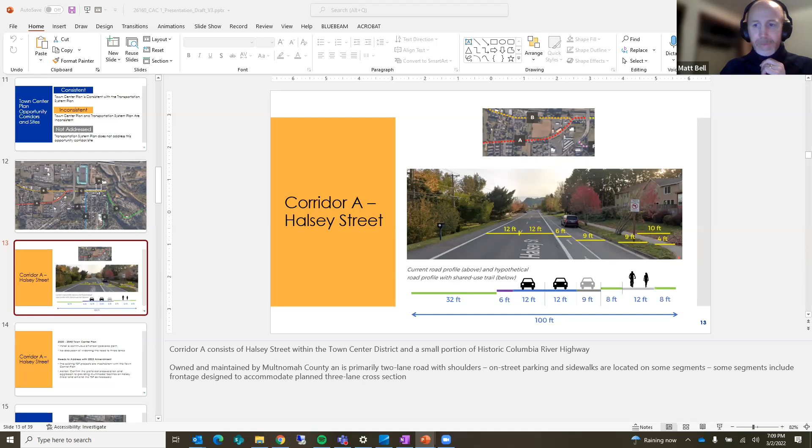So with that, Amy, do you want to go to slide 2? I'm not sure what other folks are seeing, but I'm seeing corridor A. Okay, I did not share the right screen. Thank you.

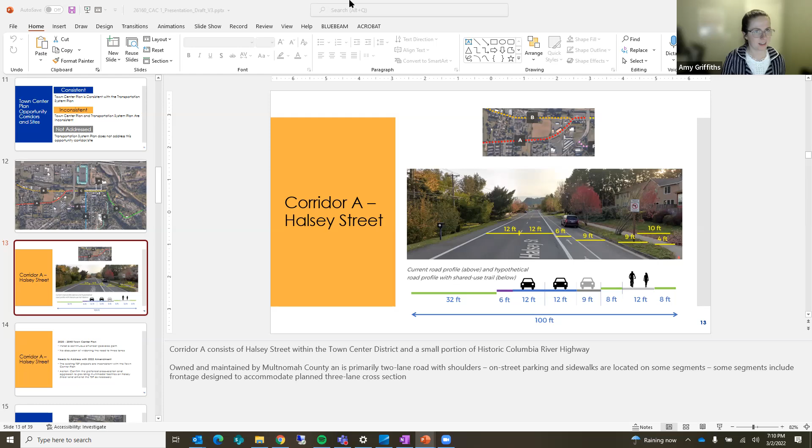So the agenda for tonight: we're going to give you a quick introduction to the project team and the role of the Citizens Advisory Committee. We'll talk at a high level about the project schedule and overview, and then I'll turn it over to Amy to talk about the corridor sites, opportunity corridors, and sites.

Next slide. The project is really largely going to be guided by three different groups. There's the project management team, which primarily consists of the City of Troutdale and the consultants, who do the day-to-day operations and create big decisions and recommendations along the way. We lean pretty heavily on the Citizens Advisory Committee to review the memos, provide input, provide guidance on policies, and give general input on how you'd like to see things within the community. Lastly, we'll spend time with the Planning Commission and City Council, as the Planning Commission will ultimately approve and recommend adoption, and City Council will be adopting.

In addition to these groups, we've also established contact with Multnomah County. As you'll see later on, a lot of these facilities will be Multnomah County facilities, a lot of the opportunity corridors we're going to talk about are Multnomah County facilities, so we'll want to make sure we're coordinating with them as well.

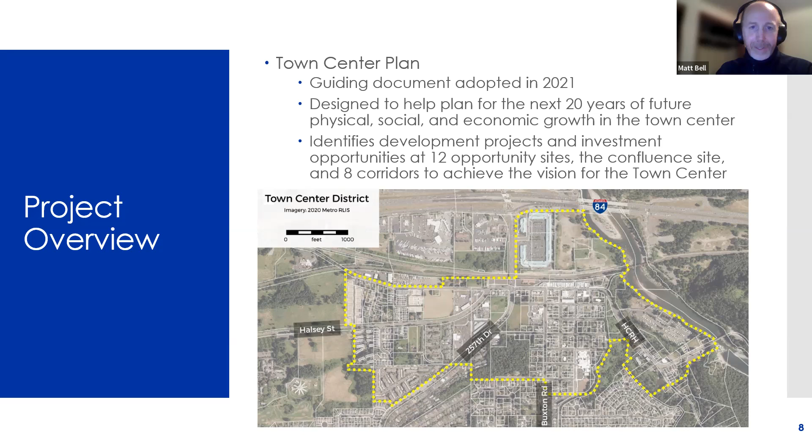So again, the town center plan. I understand you guys are becoming pretty familiar with this plan, but just a real quick overview: critical for us going forward is that this is a guiding document adopted in 2021. It is designed to help plan for the next 20 years, so it's a long range plan similar to the transportation system plan. It looks at physical, social, and economic growth within the town center, establishing priorities for a variety of things. It also identifies development projects and investment opportunities on the 12 opportunity sites, the confluence site, and these 8 corridors to help achieve the vision of the town center.

So a large focus of what we're going to be doing going forward is based on these opportunity sites and corridors. Again, I understand you're getting familiar with the transportation system plan, but just a quick review: it's a long-range plan adopted in 2014, but as I mentioned, some of the data in there precedes 2014 by quite a ways.

It provides goals and policies for development of the transportation system over time. It provides an inventory and evaluation of existing and projected future conditions. I believe it's a 2035 timeframe for this plan. It also identifies multimodal improvement projects needed to address existing deficiencies and future needs, and separates these projects into what's called a master plan and an action plan.

The master plan is a list of basically all the gaps, all the deficiencies, all the needs identified throughout the transportation system planning process. It's a rather comprehensive list of potential improvements that far exceeds what is reasonably likely to be funded over that same time frame. The action plan was an attempt for us to prioritize projects from the master plan into a more financially constrained project list that could reasonably be funded.

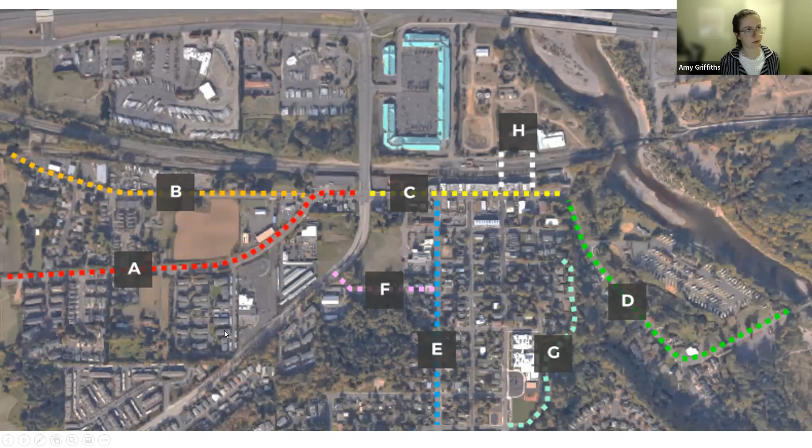The first one is Corridor A—Halsey Street within the town center district, and a portion of the historic Columbia River Highway. It's currently owned and maintained by Multnomah County, so as Matt mentioned, any changes on this roadway will have to be approved by the county, and we're definitely getting their input. Today it's primarily a 2-lane road with shoulders, with on-street parking, a bike lane, and sidewalks along some segments, plus some segments include frontage designed to accommodate a planned 3-lane cross section.

The town center plan has identified the potential for 2 lanes, a parking lane, separation from the roadway, then a multi-use path for people to walk and bike on, and another buffer from the right of way. So I'll start by saying the town center plan calls for installing a continuous off-street bike/ped path.

It does not mention widening the road to 3 lanes. Heidi, I'll call on you right after describing the rest of this corridor. In the transportation system plan, there's a project to install sidewalks on both sides of Halsey Street, widen it to 3 lanes from 238th Avenue to Historic Columbia River Highway, including sidewalks and bike lanes, and identifying that there are already bike lanes on a portion of the corridor.

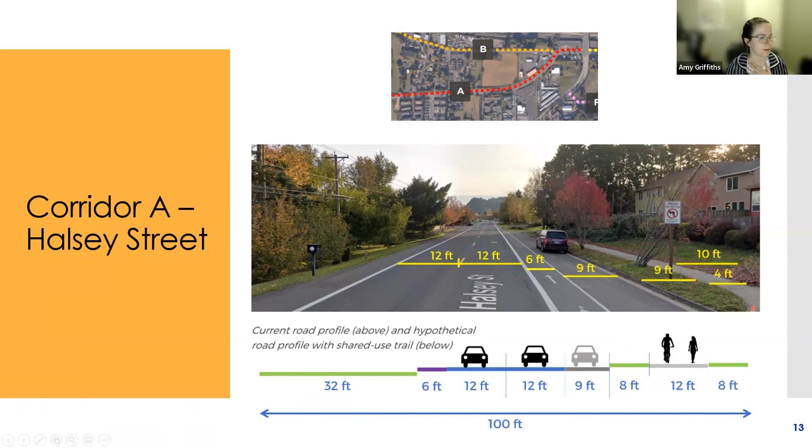Great. I think with that, I'll move on to the next corridor. So that's corridor B, the historic Columbia River Highway Halsey neighborhood segment. This consists of West Columbia, historic Columbia River Highway within the town center district. It is also owned and maintained by Multnomah County.

As you can see, it is a 2-lane cross section, one driving in each direction today, and it doesn't really have any shoulders or anything for people to be able to comfortably walk and bike along the roadway.

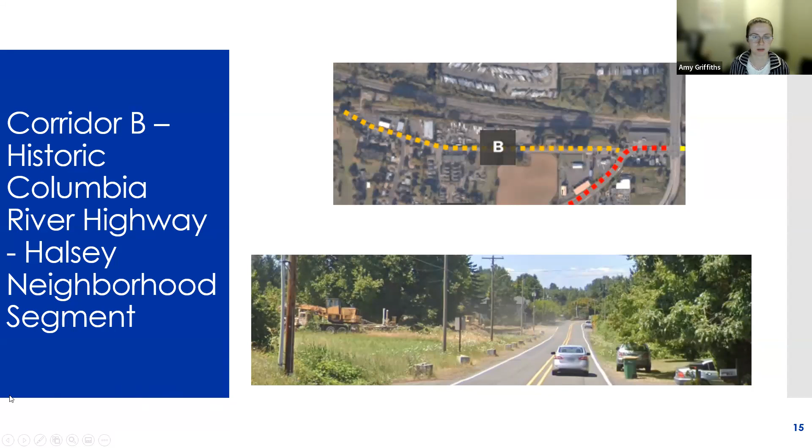And so in the town center plan, it says there's a potential that this corridor could take on a heightened role in overall circulation patterns. As you'll see with the opportunity sites, there's some potential for development in the area of this roadway segment, for more businesses and housing and other types of projects to be built, which would require more people to be driving, walking, biking, busing there.

So there's some potential that this cross section needs to be improved. And then the plan also says that the public improvement should be complementary of the development that is in that area, so that the types of transportation facilities provided are suited for the development. The transportation system plan says there should be sidewalks installed on both sides of the road, and also on-street bike lanes on both sides of the road.

And so it could look like how historic Columbia River Highway looks today. Our feeling is that the transportation system plan and the town center plan are consistent in this way, given that the roadway doesn't really have the curb separation, the bike lane for people to have a separate space to be biking, or sidewalks for people to be able to walk today. By doing those projects from the transportation system plan, you'd really be completing what is available for people to use.

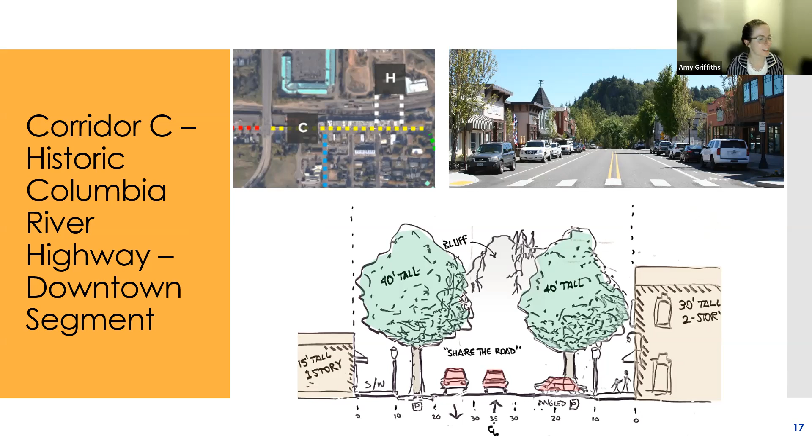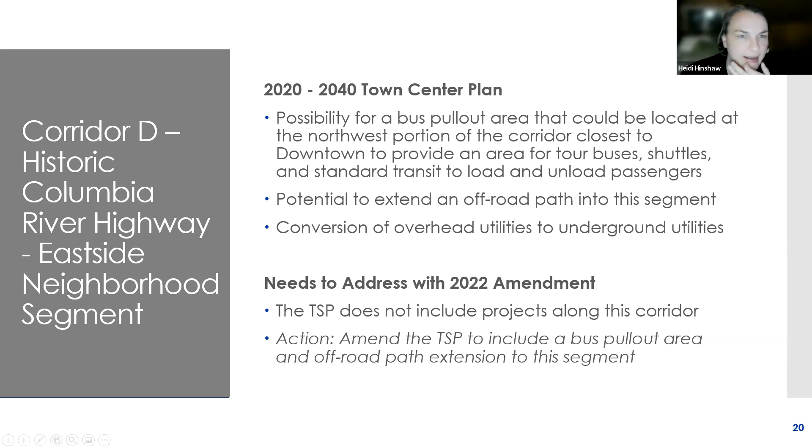So where are you guys talking about the bus pullout area? I couldn't figure that out. I think it's over at just at the end on this side, I believe. Yeah, it's up where Depot Park is today, I think is the idea. I think that's the vision for that area up there toward the north, right where the mini roundabout or three-way stop would be. There's a nice sketch in the town center plan that shows what that intersection, that whole area could look like, and also accommodating the bus turnaround.

I think one of the goals here, and we talk about this somewhere in the plan, is that currently one of the bus lines comes down and turns around at the park down there at the bottom of the hill, and that can be a bit problematic for a variety of reasons. So in combination with relatively low ridership down there, they were thinking that they could shorten up that bus line and have them turn around a little bit further up the hill.

I know we fought about it last time, when TriMet was here. We didn't fight about it, we just advocated to continue the bus line. But anyway, this is where I live.

So probably a low priority for changing that. I have kids that ride bikes, and as I said, people fly down this stretch, so anything you can do to slow them down, please, slow them down. I know that the person in this picture doesn't really want a whole lot of stuff going on in front of their house, which is fair. What about just a raised curb to protect bikes from the road, rather than building out a whole new bike lane? Just a little something to protect bikes on the northbound lane, or actually both lanes. It would be really nice to have a little bit of protection because it is a through road.

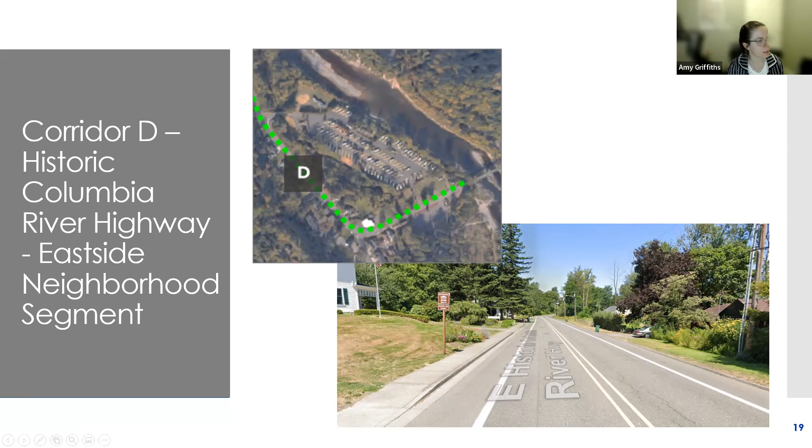Thank you all for sharing. I'll go on to the next corridor. Next corridor is Buxton Road.

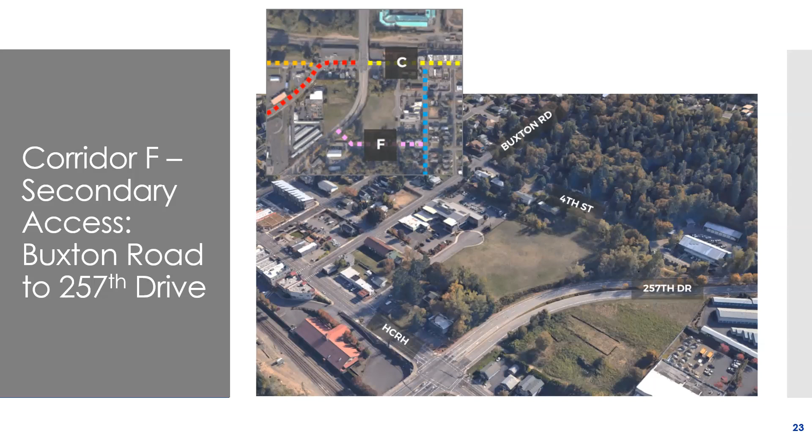I agree with Diane. There is quite a bit of traffic going up to 257th, so it's also busy. I don't feel like everybody's going on Buxton and avoiding 257th, because it's quite busy itself. I have the option to turn on Cherry Park, and I don't often, because Diane is correct that there's just a small area to turn, and the light seems a bit long, so I usually go up a little further before I turn.

So I have a feeling they're going on Buxton if they're heading towards Troutdale Road, like towards the Stark Street Dairy Queen. Perhaps that's why. And if you keep going all the way up to 257th wanting to go to, say, the Sweetbriar neighborhood, past Reynolds High School, it gets very busy. Sometimes at 5 o'clock there can be a line almost back to the high school, not quite. So there's probably actually a lot less traffic on Buxton, especially at that high commuting time. I'm assuming maybe they're going to Sweetbriar or something.

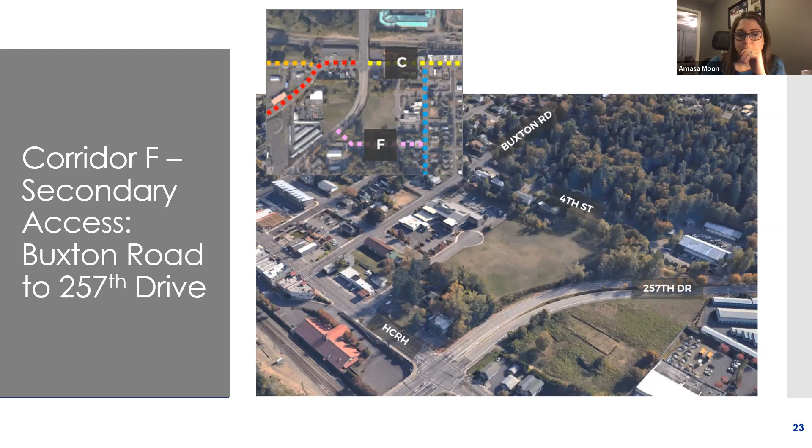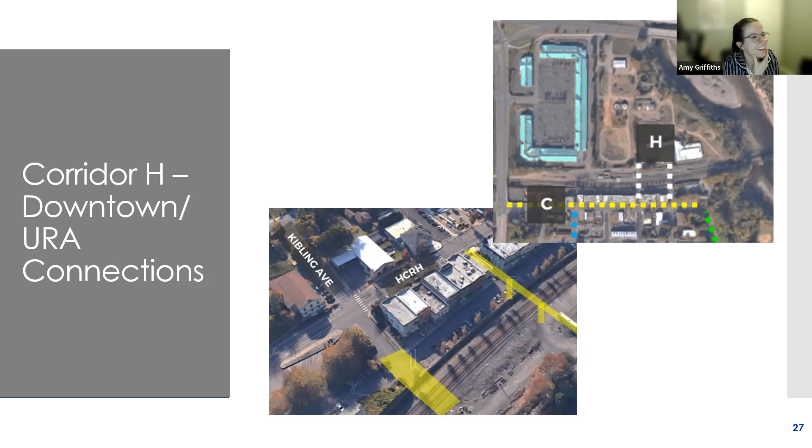Melissa, is this a polite nudge to move along? Yeah, go ahead. Okay, I'm just gonna—

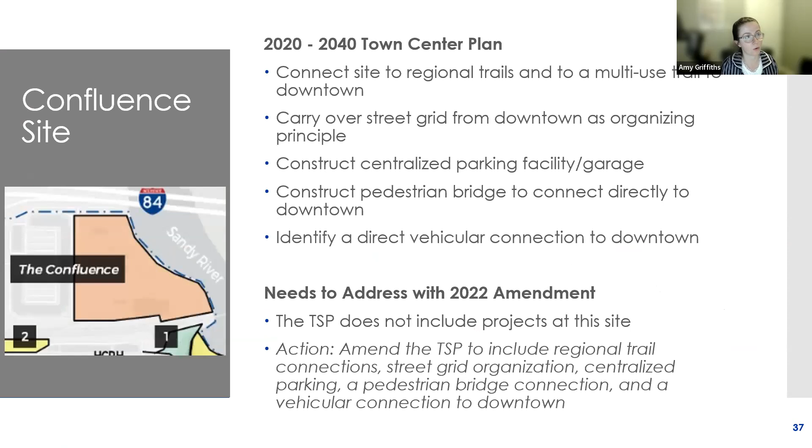Lovely comments, everybody. I'm going to skip ahead to the next steps. Like we mentioned, we didn't really have time to talk about these sites, but the corridors are really a big piece of the transportation aspect. Some of these sites are really captured within the corridors, as we were talking about, such as that conversion to that 3-leg intersection or roundabout.

So with that, the action items for you all are to review and provide comments on the first memo by next Wednesday. That memo has some information about electric vehicles and the equity piece. What we've been covering today is really found in a table towards the end—two tables towards the end of the report. I think Melissa is going to be sharing this PowerPoint with you all.

Please forward along any comments you have to Melissa, or if you've given them our emails as well, you can provide comments to us about the memos and or if you just have responses to this meeting and the content of this presentation. They're very highly related, so we welcome any feedback on that.

Our next meeting is on May 4th, so we're looking forward to talking through alternatives with you all and getting a little bit more into the details of some of the items we've been discussing today. And with that, I'm going to hand it back over to Melissa, because I know you guys have more to talk about and only 10 minutes left in your meeting.

Great, thank you, Amy. I'll give it to you, Chair Reynolds, if there's any more feedback people want to give right now. So do we have any members of the public that want to comment on the transportation system plan? Any further questions from our committee members? Okay, I think we can close that topic.